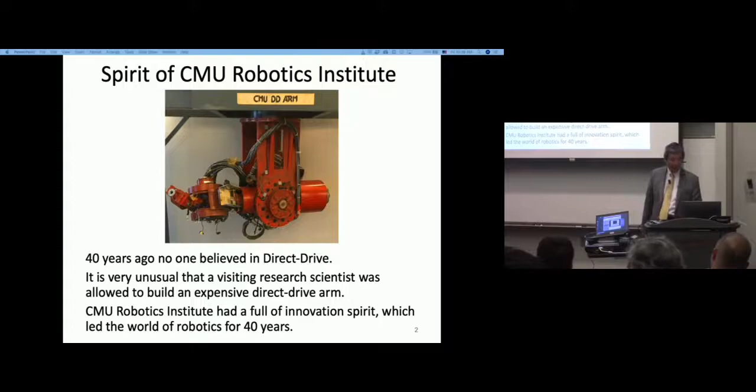The other part is power electronics. In the late 70s, the high power MOSFET just came out, and that was available to drive the big current. And these two technologies are the key things that made direct drive possible.

Well, after that, direct drive was actually commercialized by Adept Technology, and at one time Adept dominated the market, but it's a little expensive, so they were replaced by cheap SCARA robots.

This guy? Oh yeah, okay.

But one particular area, wafer handling and clean rooms, is exclusively served by direct drive robots like Brooks Automation, and here they can achieve less than 20 micron absolute position accuracy, and more importantly, no gearing, so no particles coming out. And it's easy to put suction inside the body, and that makes this one an almost perfectly clean robot.

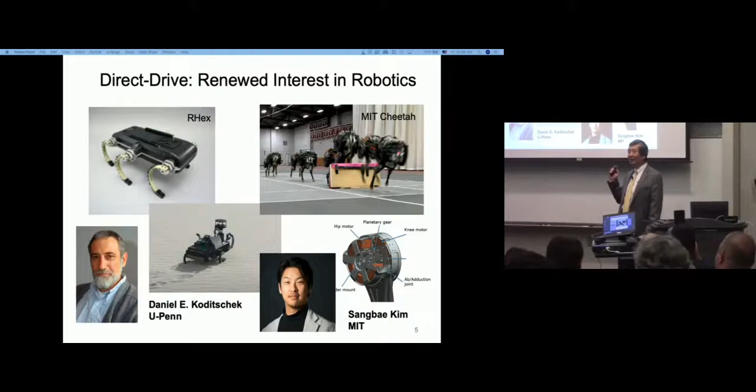Later, my younger colleague at MIT, Sangbae Kim, used near direct drive type motors to power these legs. In fact, almost 40 years ago, I attempted to convince Marc Raibert that direct drive is the way to go. But Marc is Marc, you know that, right? And he did a great job. But in fact, almost 30 years later, Sangbae Kim did it. And so that's the story.

Now, in this talk, I will not talk only about old stories, but taking the same spirit of innovation, I'd like to talk about the two major areas that I have been working on in the past less than 10 years. One is bionics, where we use living cells as a component for building robots. And the other is wearable robotics, specifically supernumerary robotic limbs.

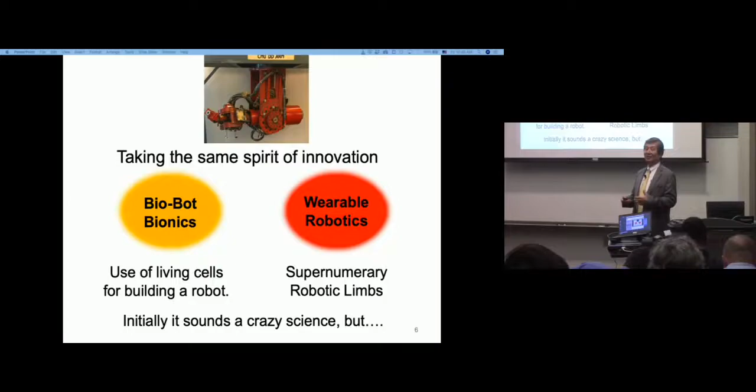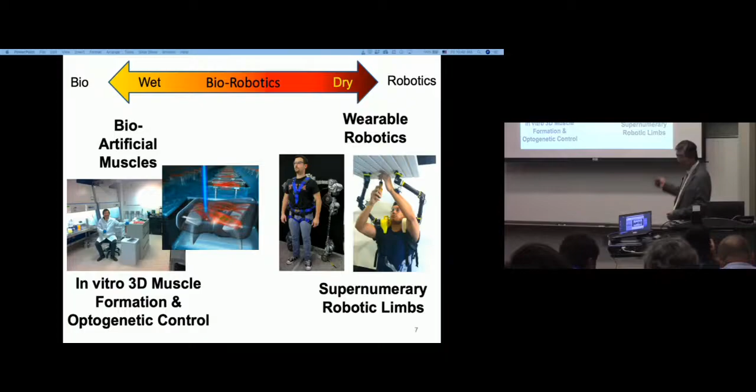When you hear biobots, bionics and the like, it sounds like crazy science. But someone told me, perhaps Takeo, that it sounds crazy now, but 10, 15, 20 years later, it becomes a standard. And so we hope that is to happen. My lab at MIT, one side is a cell culture room, bio-wet engineering. The other side is dry engineering, and we do robotics, wearable robotics in particular. Today, I focus mostly on this part. For this audience, these topics may be more appropriate.

So let me start with the supernumerary robotic limbs. You have a third arm and a fourth arm, or a third leg and a fourth leg, or you have 7 fingers on one hand. So these are additional limbs attached to your body.

When I came up with this idea, we tried to find a word which had never been used in the robotics literature. Supernumerary is sometimes used in the biomechanics literature, but never in robotics. Non-native speakers of English have to look at the dictionary, so that's the way I found this word. If you hear it once, you never forget. But it turns out supernumerary is hard to pronounce correctly 100 times every day for research and conversation. You get lost. So we just simplified it to SuperLimbs. So for today, we call it the SuperLimb.

SuperLimb is one unique type of wearable robot. Exoskeletons and prosthetics compensate for lost functionality, or empower the existing joints. On the other hand, SuperLimbs are extra limbs that don't follow the kinematic structure of the human, but come out, and we can use them freely. So it brings up many interesting things.

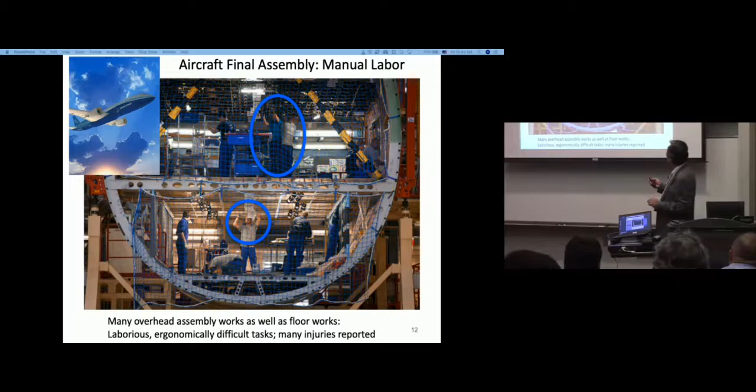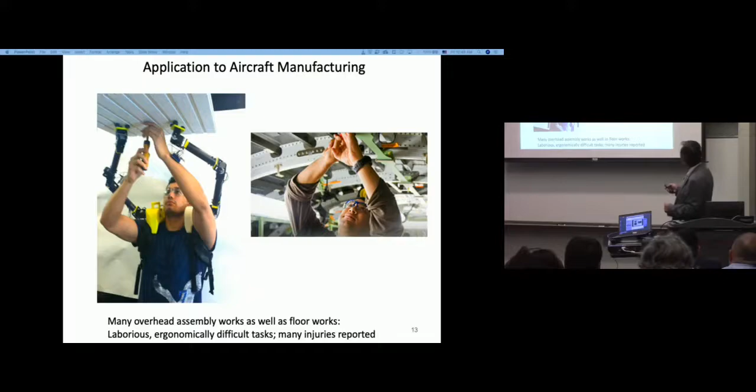The basic design concept came from real needs, and shown here is final assembly of aircraft. It's all based on manual labor. The people here work on the ceilings or floor the whole day long. They have a lot of trouble as they take these kinds of postures for many hours. Our solution is to put the robots on the shoulder, and that leads to this design.

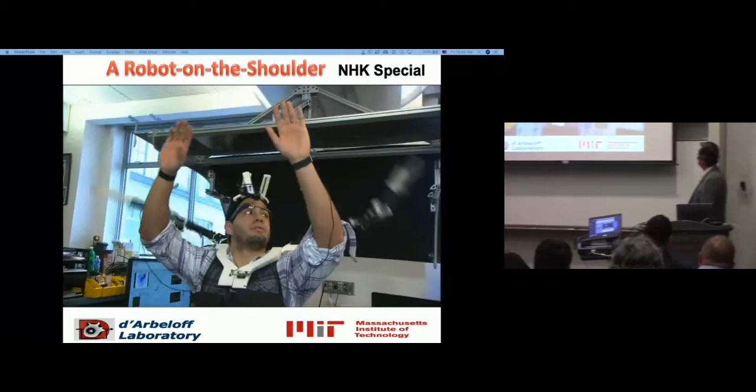At the Massachusetts Institute of Technology, robotics researchers are developing ways to add an extra pair of arms to your body. The robot will try to act according to what I'm doing. Robotic arms come to life thanks to artificial intelligence. The AI system monitors the wearer's arm movements, and eye trackers detect where the person is looking.

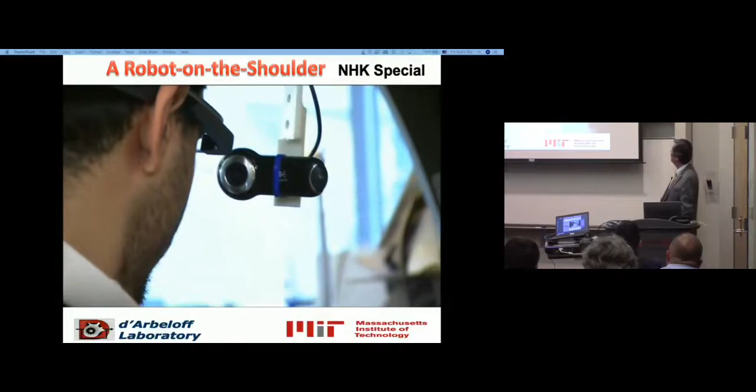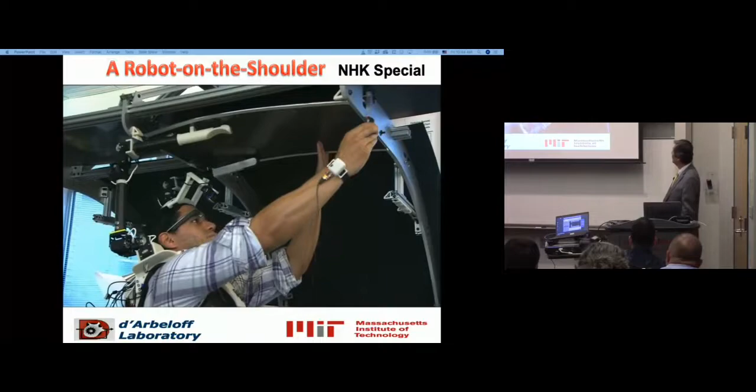From this data, it predicts the next movement of the wearer and automatically moves the robotic arms to a supporting position. No explicit human input is needed. The more you use the device, the more accurate the movements become as the AI system learns the way the wearer moves.

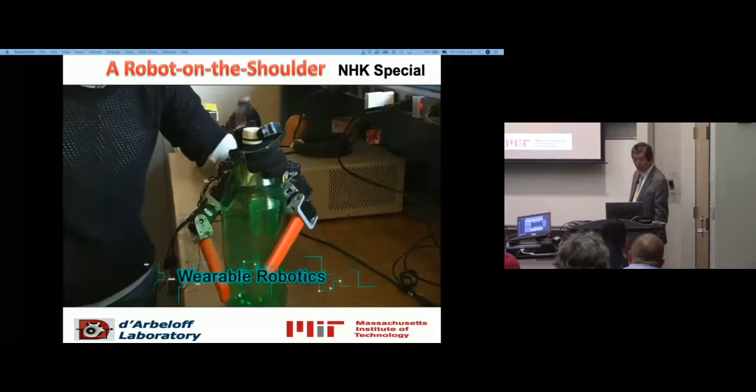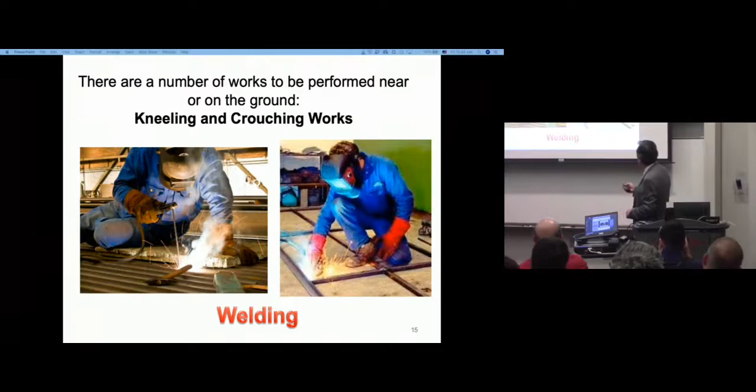You can see similar situations in construction or agriculture, gardening. You have to take that hard posture for a long time. If you continue that for a long time, you get troubles with the lower back and the shoulders and the neck and the knees. You have to extend your body to take the ergonomic posture, but you have to reach the ground. So you have to lean forward.

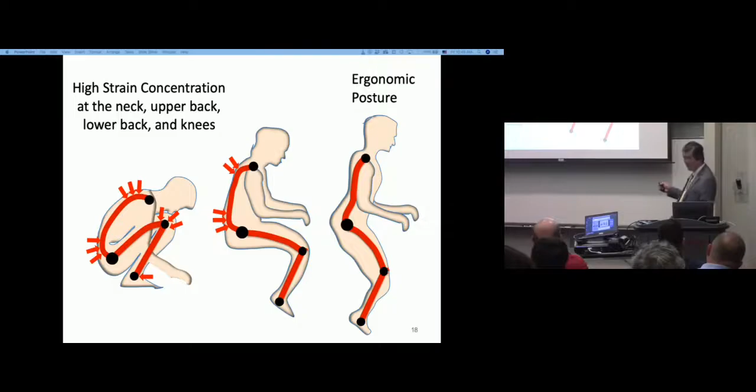Then you need the support that resulted in the concept of a MantisBot. The body is braced by extra limbs, and just like a praying mantis, freeing the two arms for eating something. So with this one, no harmful strain concentrations along the spine, and both hands are free for use, not used for just bracing its own body, free to use.

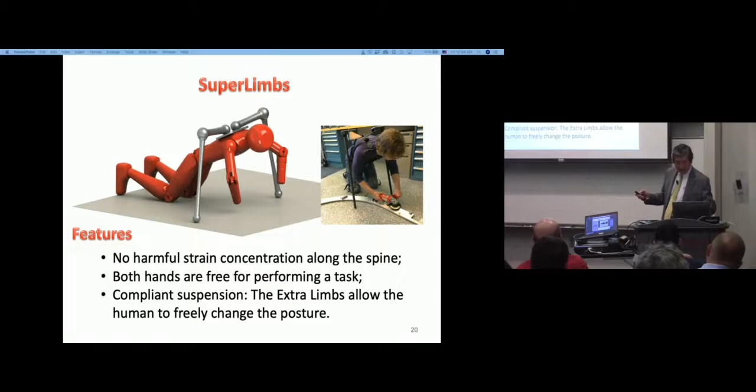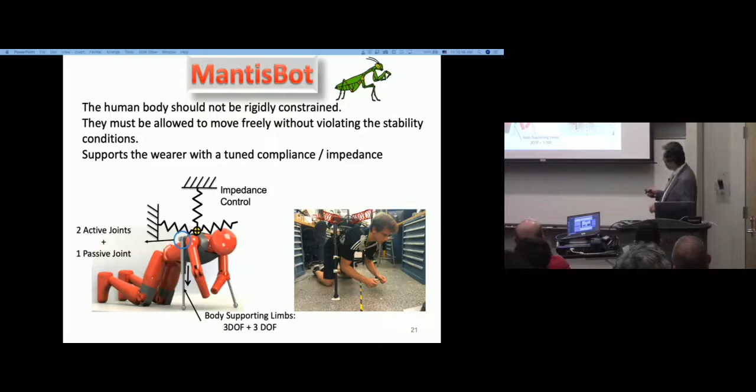And in addition to that, those are servoed joints, and we implemented impedance control. So the body is actually suspended with the desired tuned impedance and stiffness damping. So you are free to move. You can see the fundamental difference from exoskeletons. Well, an exoskeleton basically empowers, strengthens the joint strengths.

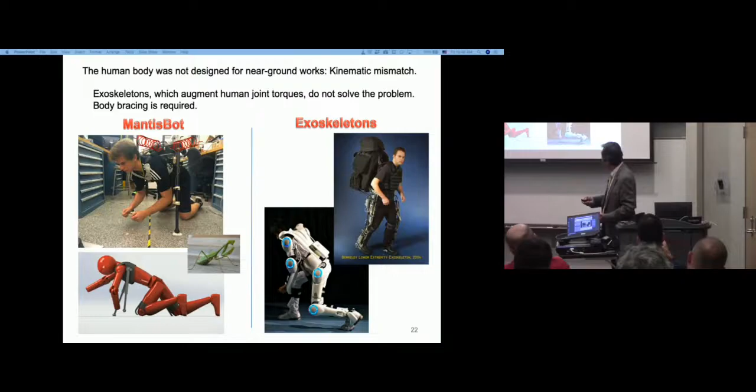But if you apply this one to this kind of work, working on the ground, you find that the human body is not designed for doing the floor job. This is a kinematically wrong configuration. So even though you strengthen the joint, it doesn't help very much. So you have to change the structure, and that goes to SuperLimb.

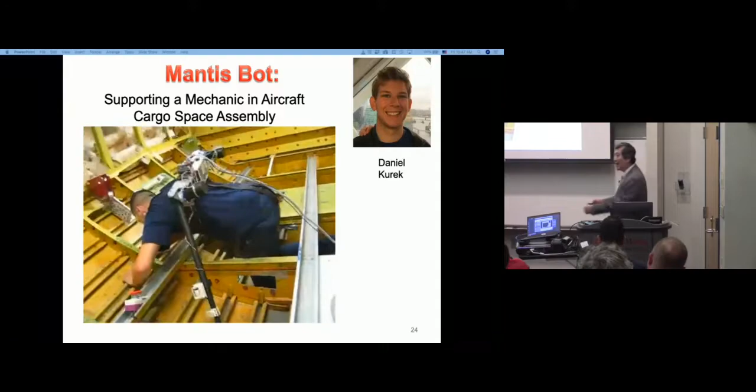So as you see in this case, floor work, they have to take this posture for a long time. So we tested this one. Simulated motions. So this is a Boeing 767 cargo space. You really have to reach in here and take this posture all day long. So there are interesting application areas.

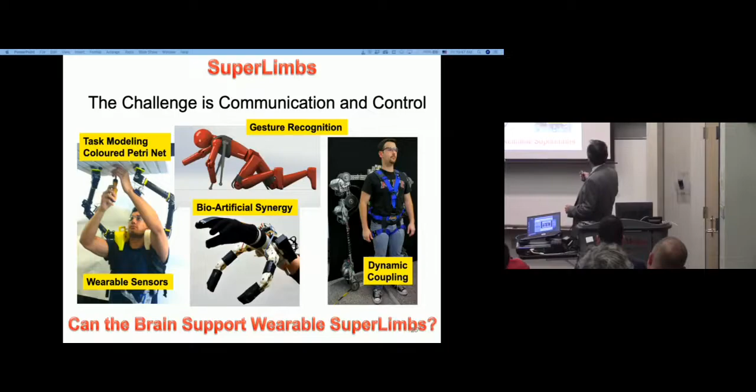We started with many different designs, but the challenge is communication and control. Unlike the exoskeletons, which just follow the natural legs and arms configuration and extend their strength, with SuperLimbs you can take any posture, so you have more opportunity, more freedom. However, you need more control and communication, and control is a major challenge. So we worked on this quite intensively.

One type of control is a spontaneous, independent control where you want to express your intention to the robot, putting some sensor here, right? The other side is actually reducing the workload for the humans, so maybe autonomous control. The robot has its own sensors and closed loop. However, don't forget that this robot is attached to the human body and has to work in concert with the humans. And if the robot does the job in its own way, it's out of control. It's not the kind of stuff that you want.

So somehow, how do you guarantee, assure the coordination with the humans? So one particular mode is the so-called leader-follower control. And then we extended it to bio-artificial synergies, and let me explain this. So simply, in the previous example, robots on the shoulder, we actually did some kind of teaching by demonstration method. This ceiling panel work has been done by 2 workers. Here's the leader and the follower.

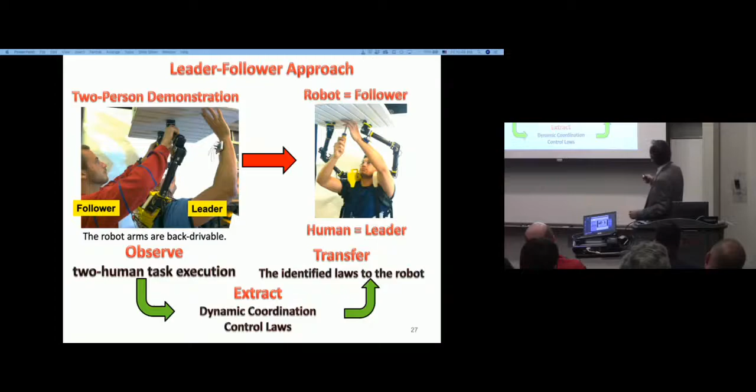At this time, the follower basically supports the leader, but at this time, holding this backdrivable robot, shows the kind of posture that this robot should take. And we take measurements of both the leader's arm motions and posture motions and the joint displacement of these. Then we get the data and extract the coordination predictor to predict from the human behavior to robot actions, and that is transferred to the robot.

So you take some time sequence data. Basically, we have many measurements, and set these time windows. So we get the 360 dimensional input space, taken from the human leader motions, mapped to predict the 8 DOF robot motions. So the measured output is the output data to predict, and we put it into a data matrix and do some partial least squares analysis.

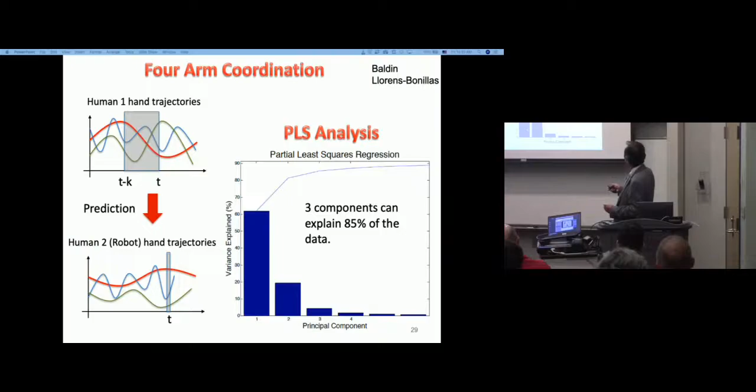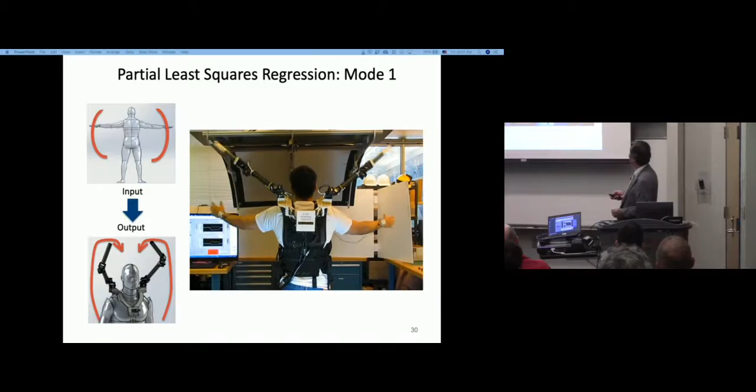Basically, we do singular value decomposition of the cross covariance matrix between input and output, and pick the first most critical component, the second one, the third one, just like principal components. And the first few components explain almost 90% of the data. So this is the first mode. As you move this, the robot reacted to this. This is what you did in teaching by demonstration. And this is interesting. Mode 3 is kind of an unexpected mode: you move this, and the robot reacted to that one.

So we basically simplified the high dimensional stuff. And at the end of the day, we need to measure only 3 components. And then each of them goes to 3 modes. And these modes are called the synergies in the biomechanics and motor control literature. The brain does not control the individual muscles, but instead the brain controls groups of muscles, as shown by the eigenvectors. So just the 3 components allow you to do that.

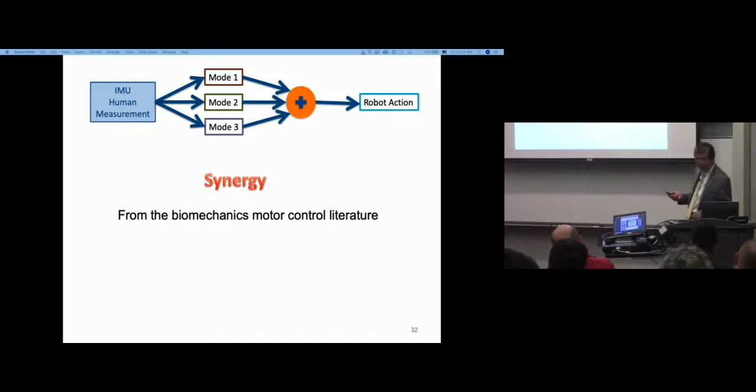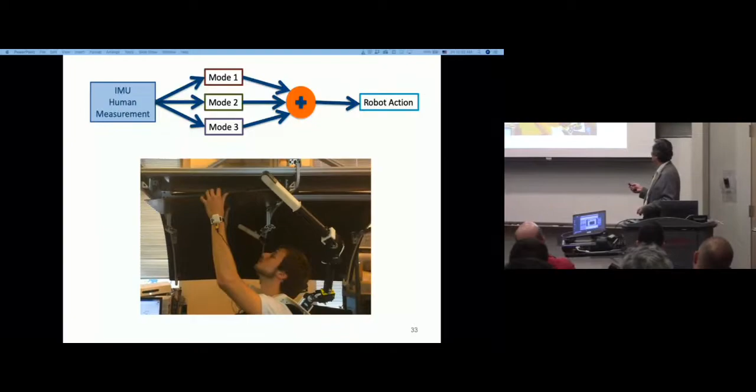So as he moves up, this robot reacts to it, and as he moves, taking that measurement, the robot recalls what was done before, and moves to the next section.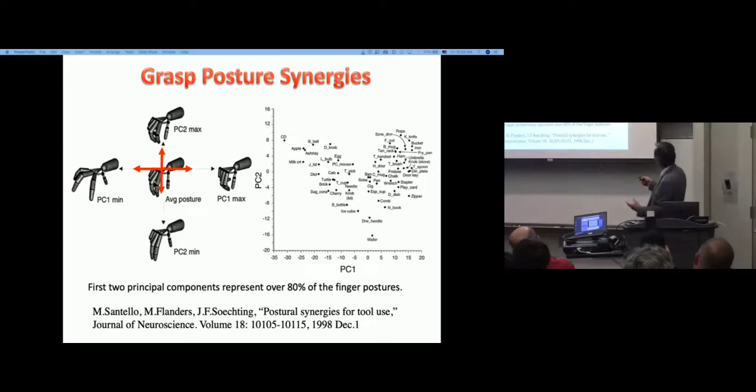Well, the same thing we applied to grasp postures, and it is known that the 5 fingers are not moving independently. According to Santello's experiment, he took the finger joint angles, 19 joints, when human subjects tried to pick up eggs, a toothbrush, and so forth. They got some data and did principal component analysis. The first 2 components: one is open and close, in phase. The other is kind of twisting. These 2 modes explain more than 80% of the data.

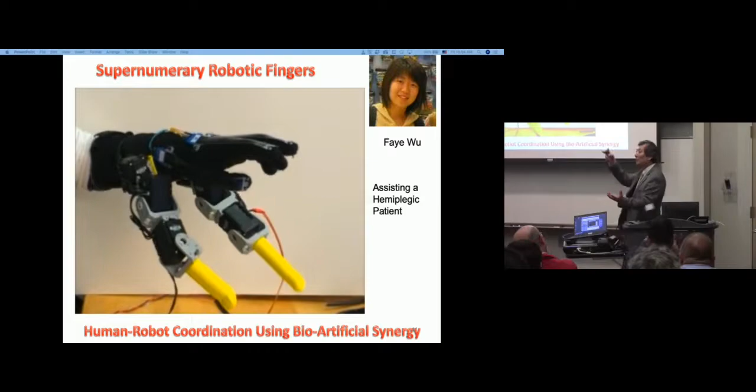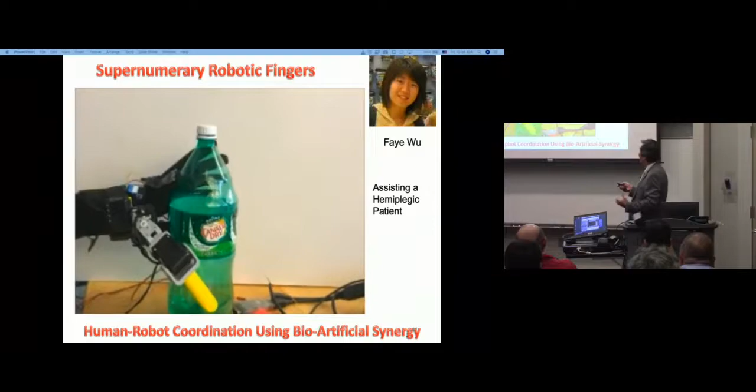So again, we have many degrees of freedom, but the central nervous system does not control individual muscles, but groups them together, right? So as if the nervous system extends to these fingers, if that is the case, what is the behavior you would see? Although we don't have the nervous system here, it looks like it's actually extended to this.

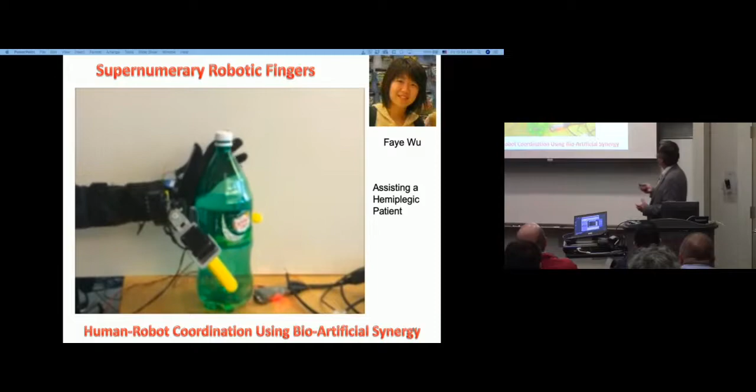Now, this work is primarily for assisting hemiplegic patients. So one side of the arm is not usable. So they appreciate it if the one hand can hold and manipulate some tools like this. So that is a leader-follower type of control, and we call this method bio-artificial synergies.

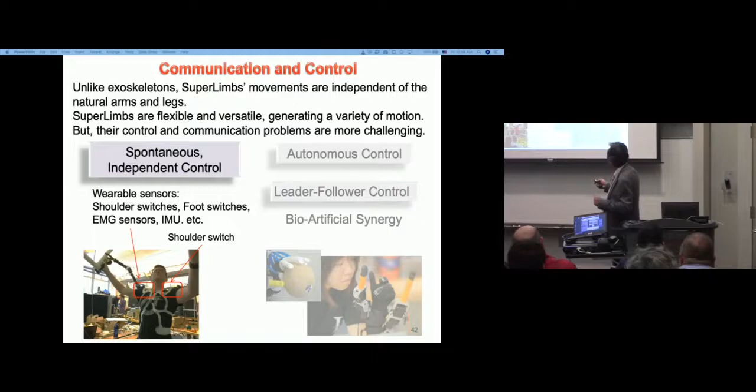Now, the other side is spontaneous independent control, and people try to put many wearable sensors at many parts of the body, including foot switches and shoulder switches, so that it does not interfere with the main task, but can also control the extra limbs. Now, an interesting point is that looking at the whole body, hands are the most dexterous part. So if these hands are available, you would use joysticks or switches to control it. But those most dexterous hands are usually busy performing the main task, right?

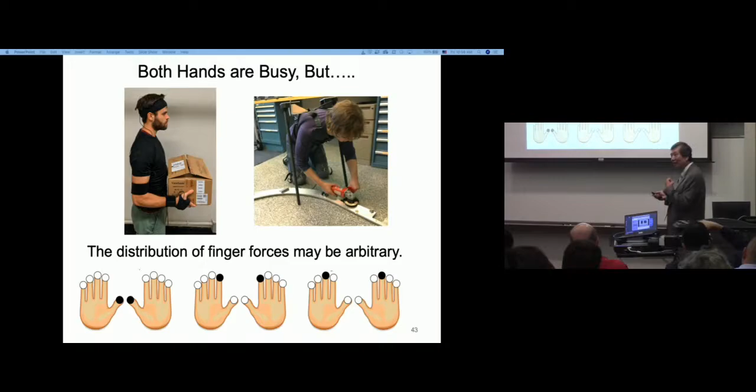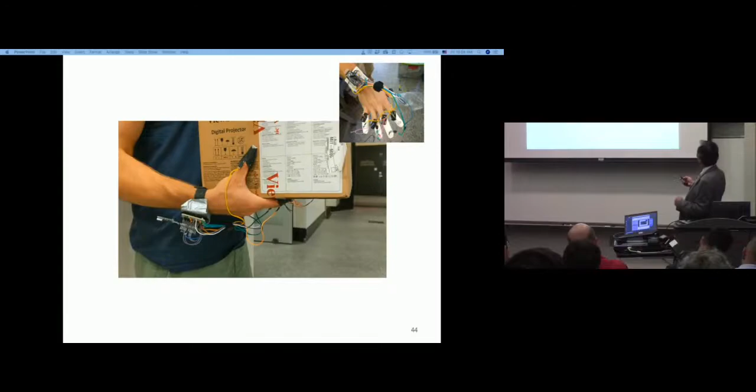However, if you think a bit more carefully, holding this grinding tool, of course, the total forces created by 10 fingers must satisfy a certain value, but although the sum is fixed, the distribution of finger forces may be arbitrary, so that gives you the chance to create some code to send to the robot. So here's the fingertip sensor implemented. You don't have to detach from it, but just by changing pressure, you can send some commands.

What we do is first ask the human subject to show many finger holding operations, and it turns out that the first few components again represent most of the data, leaving the 10 dimensional space beyond this point unused for performing the primary task, that is, holding some tools. So you can use this space for sending coded signals to the robot. That's what we call null-space communications. So pushing this one, SuperLimb up, this one SuperLimb down, so that kind of code can be created.

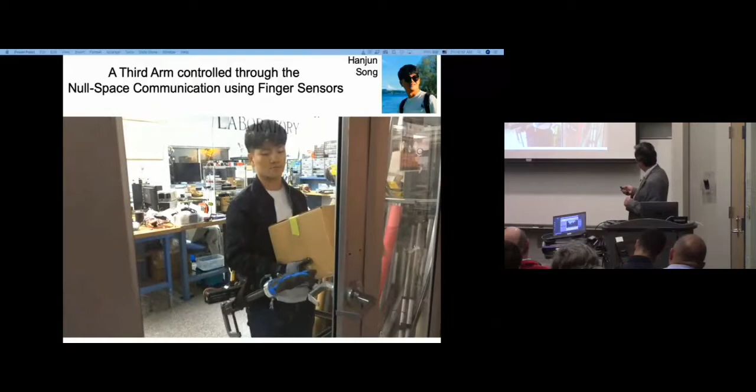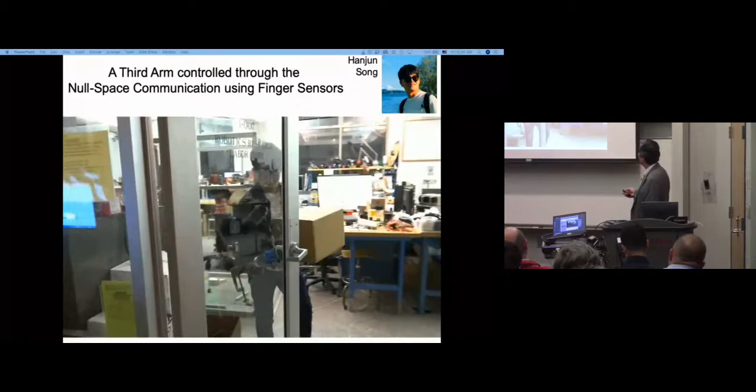So Hanjun is wearing the simple robot, and he's also wearing the glove there, so he can control this robot with this, although both of his hands are busy holding this box. But he can control this, right? So it can go, and he's going to the elevator hall. Oops, elevator's coming. I do not recommend this, but you can do that.

Yeah. Hey, Hanjun! It's been so long, man. So that party.

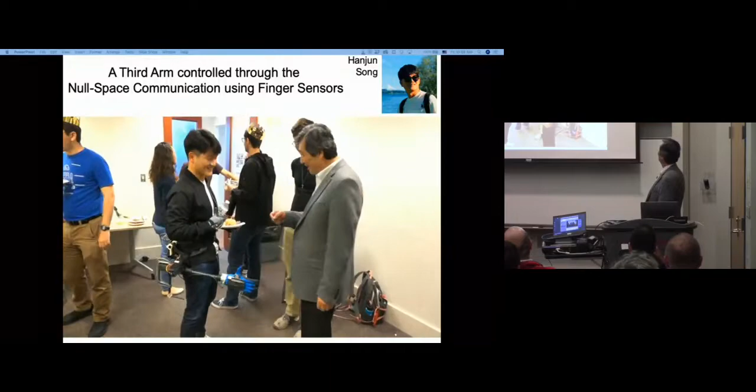You are? I suggest that this may be a good costume for Halloween, and if you wear that and move around and move stuff, but don't do it for your kids.

Now, on the more serious side, control of SuperLimbs is not just a sensor design in that kind of a program. We face much more profound scientific issues. To a large extent, SuperLimbs are to perform multiple tasks, right? So maybe two of them are SuperLimbs, bringing a foreign object attached to the human body. Can the brain support the SuperLimbs? Can a human control the natural arms and SuperLimbs simultaneously? Would there be some kind of cognitive limit to it?

And if you look at the brain, all the places are kind of busy; the body image occupies the whole part of the cortex. Is there any room for the SuperLimbs to create their own brain image over here? However, if we do the right things, and the SuperLimbs are nicely mapped out in here, would it be possible that the wearer gets to perceive the SuperLimb as a part of his or her body, an extension of the body? How can we make that happen?

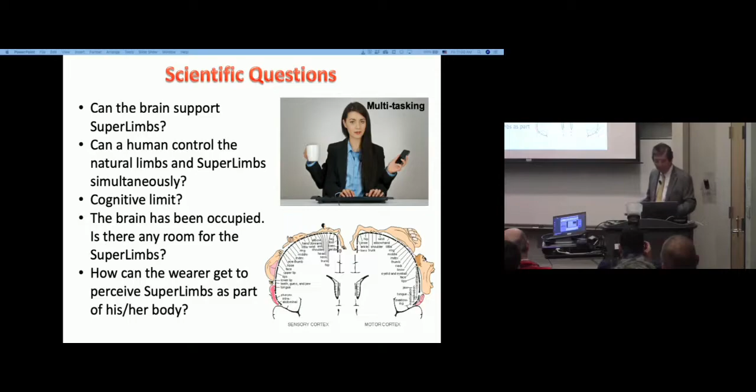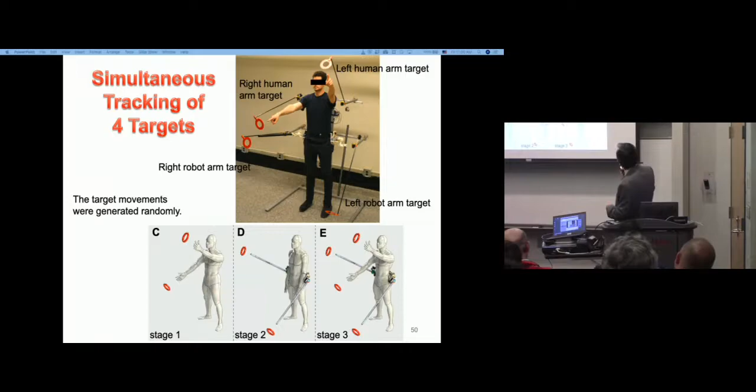So, Federico Parietti did the first human subject test. What he did was he built two simple 1DOF SuperLimbs, here and here. And his arms also have to follow these targets simultaneously. So in this experiment, the human subject is pointing their arms along this marker direction, to this one and this. And these are the SuperLimbs, pointing at this marker. This one is a little hard to see, but the black ones are pointing at this one.

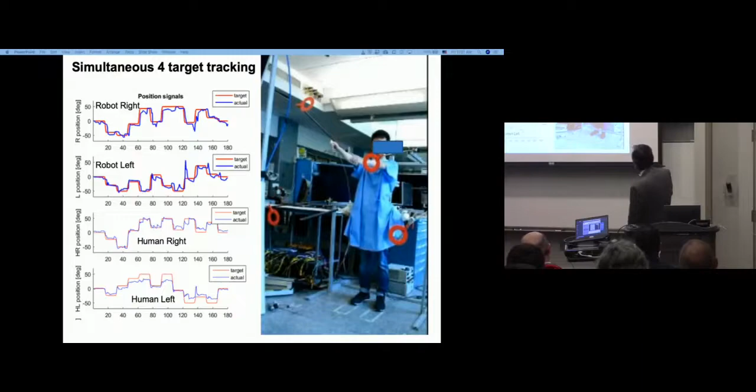And they change the locations simultaneously. And you have to make sure this one is pointing in certain directions. If you see this, the robot right arm, the robot left arm, the human right and left arms are approximately tracking this reasonably. He used EMG, in particular measuring the muscle activities at the abdominal part, which is not used for the arm motion, so we can do it independently.

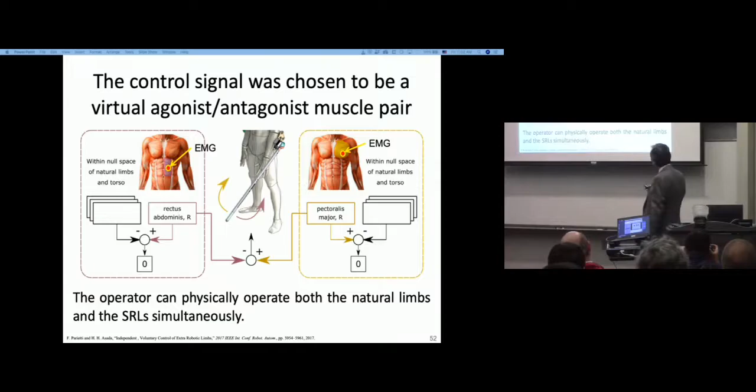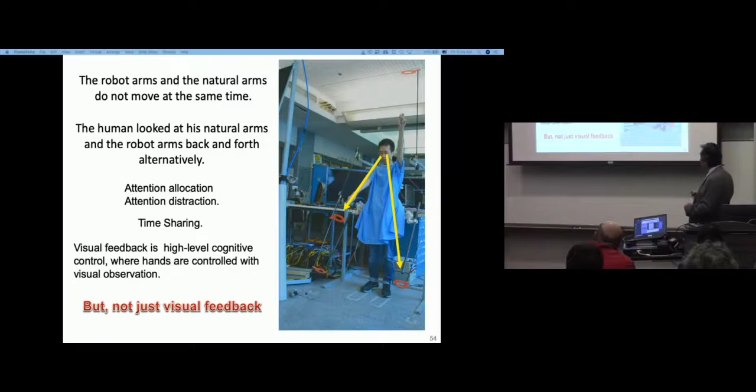Now, visual feedback, the high-level cognitive control, dominated this experiment, and hands are controlled with visual observation, but not just visual feedback. We have some haptic feedback. This is the interesting part. This is the robot on the shoulder. The robot is holding this part while he works on fixing it. The force borne by the SuperLimbs is transmitted to the wearer's shoulder over here. So the wearer recognizes and confirms that the robot is really bearing the load. The robot is not sitting on the floor but attached to the body. So we have inherent haptic feedback acting on the body.

So in some way, this direct haptic feedback may reduce the visual cognitive load of the human, and the SuperLimb has this unique feature, feedback that can be exploited. So Jacob Guggenheim looked into visual and haptic feedback in depth and how they work together.

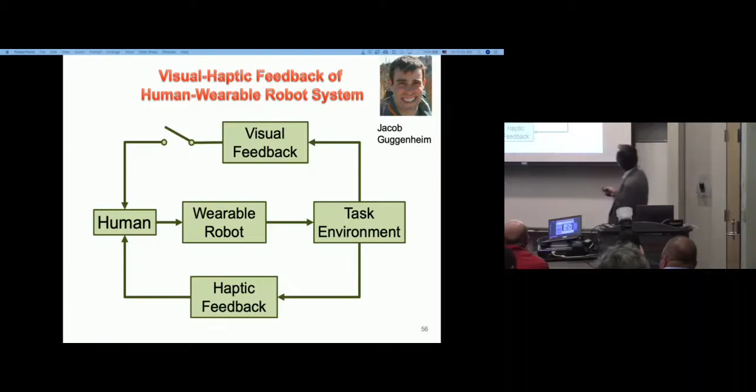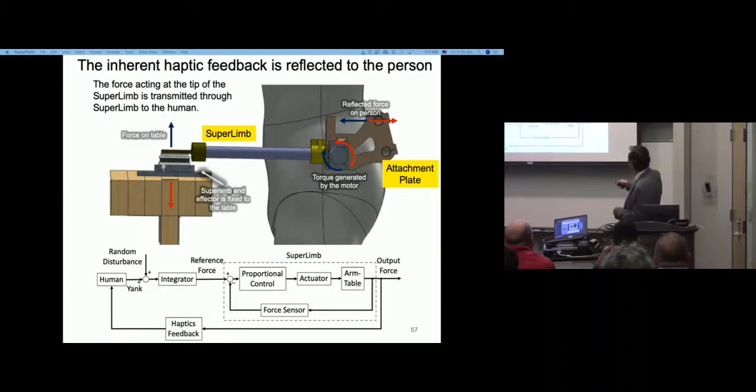In his experiment, first he developed a simple SuperLimb over here, which is contacting the table and applying some force. Thereby, it receives the reaction force, and that's transmitted to here. And he designed a simple attachment plate. Through that, the human senses the force and torque being generated here. Well, the back is the most insensitive part, but he found that the robot and the human can control this force feedback loop through this haptic feedback.

And there's no statistically significant difference between these two cases, even though you impose an additional visual task. Most of the human subjects did equally good work as with the haptic-alone task. The visual task degrades a little bit as you add the haptic task, but the difference is not statistically significant.

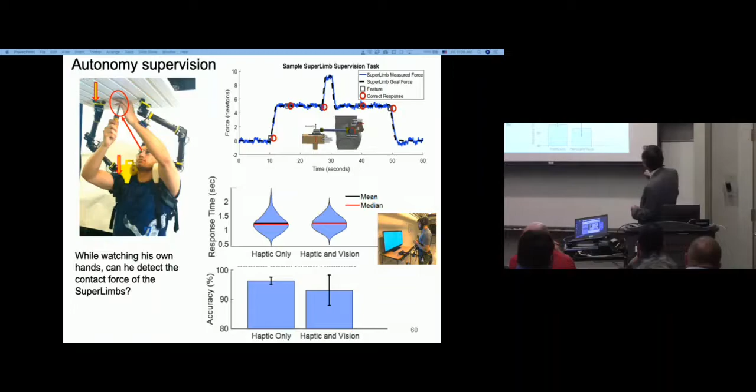It turns out that again, with both the haptic and the visual distraction task performed at the same time versus haptic alone, there's no significant difference between the two. This one's also not so significant. So we can conclude that there's no statistically meaningful difference in performance between simultaneous haptic plus visual task versus haptic task alone. So this is good news for us, because visual and haptic feedback can coexist and function simultaneously.

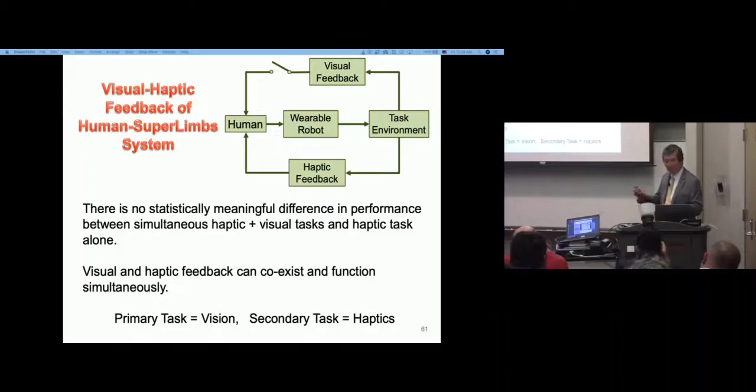So when you're multitasking, mostly the primary task will be done by the natural arms and monitored by vision. And the SuperLimb is mostly supportive work, the secondary task. Visual attention is not going there, but the haptics is always acting to see whether something is going wrong.

Let me talk about one more interesting thing. This one is the DOE project. This is radioactive waste management systems, and the workers there have to wear very heavy personal protection gear. It includes the oxygen tanks and the air conditioners. If you put everything together, it's more than 30 kilograms, so 60 pounds. It's a very heavy load, working there for a long time.

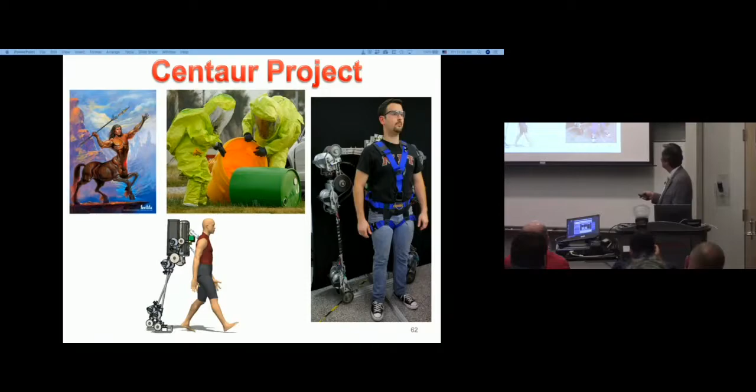So we built a robot to reduce the load, and all life-saving equipment is carried here, working together with the human. So it turns out the two human legs and the two robot legs have to work together when walking. And this turns out to be an interesting problem, because with two pairs of legs in animals, the central nervous system creates beautiful coordination between rear legs and front legs. Likewise, BigDog has a nice computer to coordinate this, but we're dealing with half human, half robot systems.

We first tried to combine this rigidly, just like the exoskeleton people do. It turns out that's not a good idea.

And in fact, if you connect these with some compliance and a dashpot, we created a very interesting behavior. If you look at the animals' walk, the front legs are number 1, 2, the rear legs are 3, 4, and it goes 1, 4, 2, 3, 1, 4, 2, 3. That's actually the gait, right? When you're walking, because that maximizes the static stability.

Now, interestingly, as you model this as two independent biped systems and connect them through a dashpot and springs, initially it's an arbitrary phase, but after some time the front legs and rear legs are 90 degrees out of phase, which is exactly what animals do. So these two are not connected through active control, but just by passively connecting them, we can actually do interesting jobs.

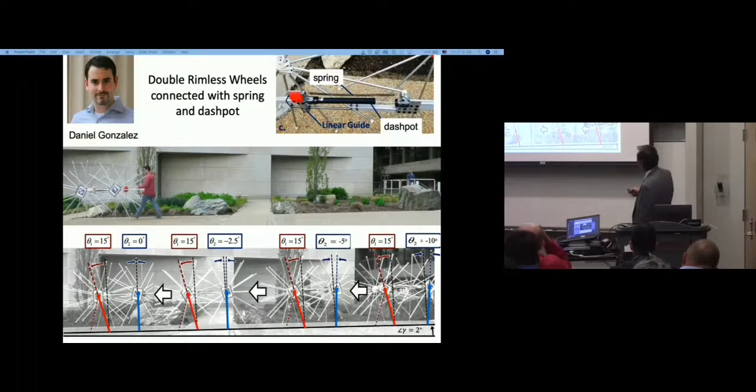And so now Dan Gonzalez did a very interesting experiment. This is actually two sets of rimless wheels. Both are connected through just passive springs and a dashpot. He started with some arbitrary initial conditions and let it go. Interestingly, at the end, these two are exactly 90 degrees out of phase, or 25% of the cycle. So initially, then he measured this, it's going there.

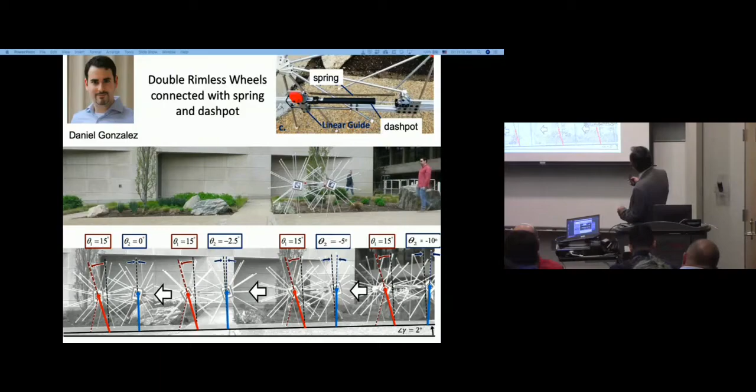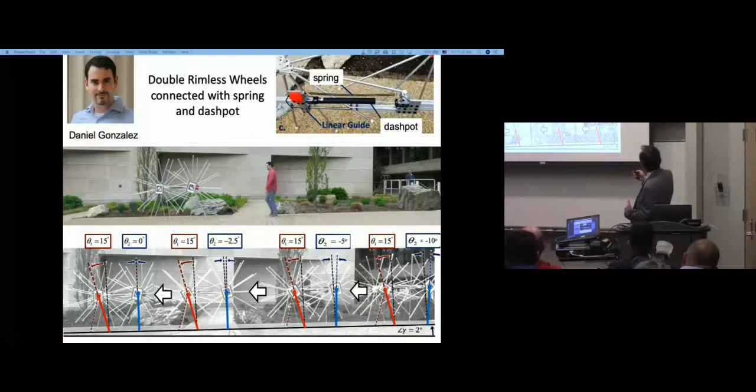There's no active control or communication between this part and this part, but dynamically interacting through the springs and dashpot, it arrives at the right phase, which is wonderful, and that leads to very stable locomotion.

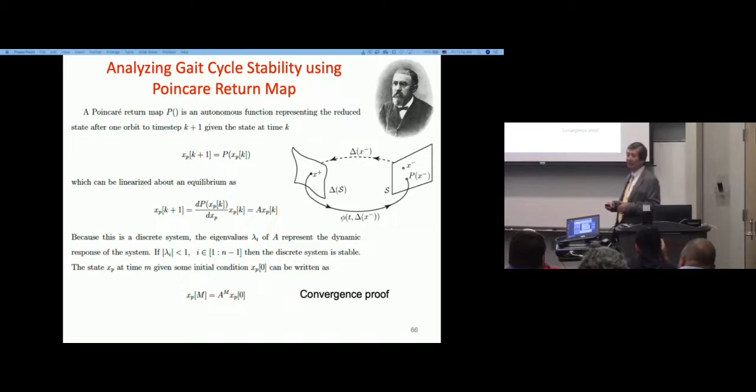Of course, we did some analysis, and this is the Poincaré return map. That's kind of a standard technique in the legged locomotion community, and we checked whether or not these two rimless wheels converge to a certain desired phase lag, and we accomplished that for certain combinations of damper and spring constant. Yes, the systems converge to that one firmly.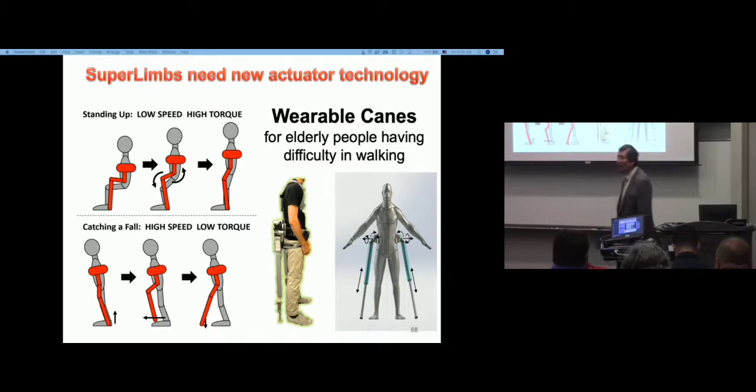So it turns out that if you plot it on the speed-torque characteristic curve, you use these motors in two extreme conditions. One is that you have to generate a high torque at a very low speed, or you have to move it quickly through space where only a small torque is needed. So how can you meet this?

If you just pick one motor to cover these two extreme cases, you have to pick a gigantic motor, whose output power is maximum in the mid range. This is the least used region. So the actual power coming out of this is just this much or this much. Very bad usage. So we recently solved this problem by combining two tiny motors.

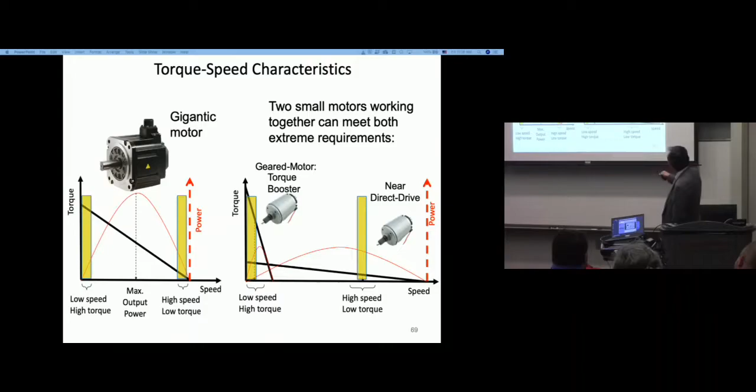It's called the dual motor design. One motor is near direct drive, in the high speed range, and the other motor is a geared motor with high gear reduction. It's called the torque booster. So by combining these, we get much more efficient operation. There are two ways of doing this dual motor, dual speed actuator. One is adding two speeds. The other is adding two torques.

Adding two speeds, typically we use differential gears. So the high gear, high torque motor comes in this way, and here's the direct drive, going to this. For high speed motions, this one takes most of the velocity. But in the high torque case, this one plays the major role, but this has to bear the same torque. And this one cannot actually bear the torque, so we have to use a brake or non-backdrivable gears such as the worm gear, which is very bad in efficiency.

So this is one design, and the other design is to add the two torques together. This is actually interesting too. Let me start with adding the two.

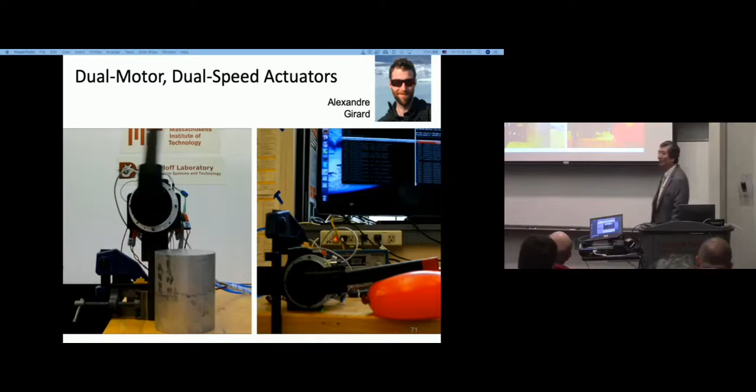So it moves very quickly, and then pushes the very heavy stuff. And as soon as it hits, the brake is on and it changes the mode, and it becomes 20 times bigger torque being generated. This one too, once it hits, it switches back, and large torque comes out.

The other way is to use a different architecture, torque superposition. In this case, the previous one is good, but it still needs to use the brake, and that's not good, and it's a little bit bulkier. So we try to minimize the mechanisms, and our solution was just putting them together. So this is direct drive, and this guy is just attached, connected to this. We don't want to use any mechanical switches or on and off brakes.

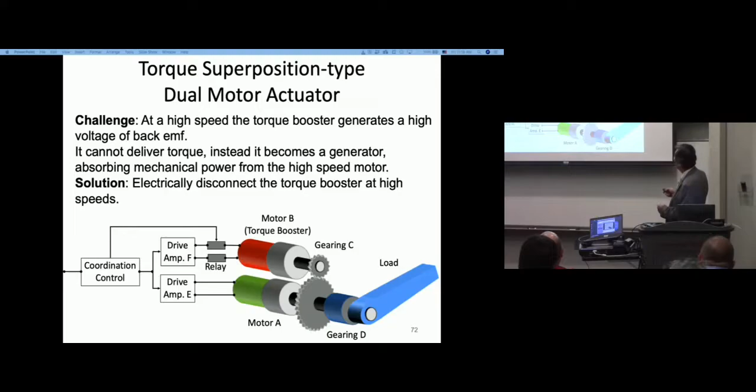So the problem is that in high speed mode, this is spinning at high speed, and this one cannot catch up with it because it's high gear reduction, and if you rotate it, it creates a large back EMF voltage. So in a sense, this works as a kind of generator, eating up the power from this, which you don't want to have. So the idea is that we make not mechanical switches, but electronic switches. We basically disconnect these motors from the drive system. So let it go. That is a simple idea.

And this is the recent result. So this lamp is on when the torque boosters are engaged. When accelerating, large torque is needed, velocity is still low, and the torque booster is working. But after moving here, the torque booster is electronically disconnected. John Bell developed the time optimal controls in doing this. So here, just a single motor goes up and around. It takes a long time.

But on a dual motor, with this switch off mechanism going up beyond this limit, if the travel distance is further, it goes higher, and comes back, right? And coming back is along this trajectory, which is very quick deceleration because the torque booster is engaged again. That quickly stops it, so we can shorten the time. If we do not switch, it takes more time. And the top speed doesn't go up beyond this limit.

What time is it? Okay. Just 2 more minutes, okay?

You're very interested. Okay. I had to show this at the end, but this is really, how to say, the crazy science. But we've been working on it. Use of live cells as components of a robot. In particular, we are interested in cardiac muscles or skeletal muscles, and using them as actuators.

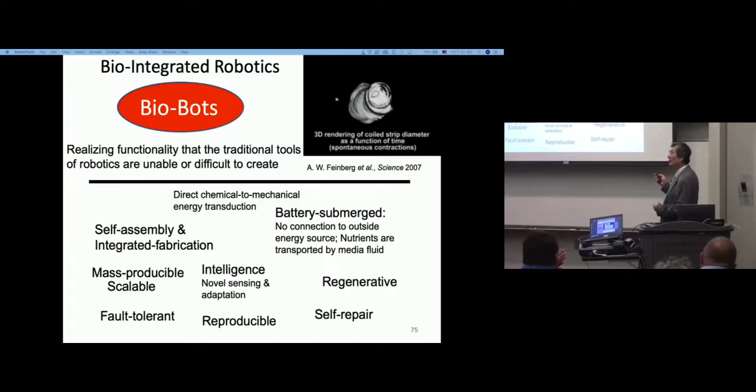If you try to build a small robot, the difficult point is always how you power it and how you run the cables from the battery to there. But these animals, I would say the robots, is it robots or animals? The robots. They're basically submerged in the media, so nutrients and oxygen are transported through that. Of course, you have to use some vascular network.

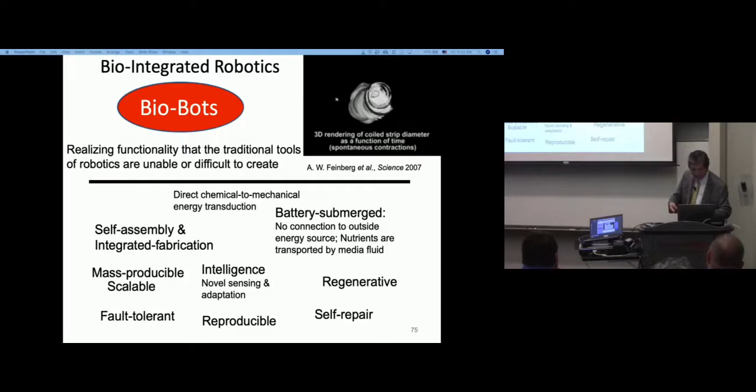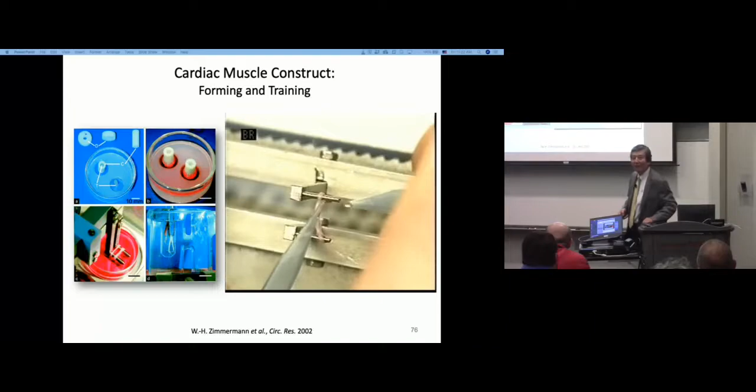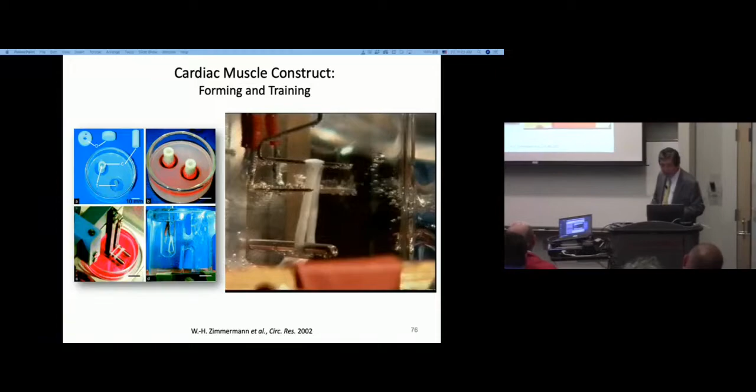Well, you think that live cells are a totally different kind of species, hard to handle in traditional engineering, but in fact, it's not. We use a lot of mechanical engineering type techniques, including fine molding techniques. We mold them, and these are cardiac muscles, so they are spontaneously contracting. It's not a rubber band, it's actually muscle, so it moves in this way. So that is something already existing.

However, how do we really control and coordinate that? That's very important. The traditional method is to use electric stimuli, putting in some electrodes and then stimulating. One problem is that in a wet environment, the current flows unexpectedly, so you can't pinpoint which particular muscle to activate, right? And also, it has relatively slow kinetics and poor reversibility, and most importantly, it's very invasive.

On the other hand, we successfully accomplished optogenetic control. Instead of electric stimuli, we shine light on the muscles, which are changed to have a different behavior, so that they respond to light.

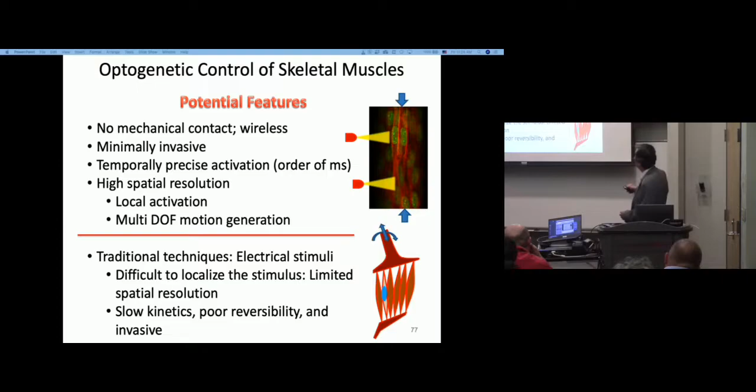So no mechanical contacts and wireless communication, minimally invasive, and actually temporally very precise. And also important is that spatial resolution is extremely high, and a multi-DOF motion can be generated. My postdoc, Selman Sakar, did it first back in 2012 for skeletal muscle. You know that the cardiac muscle contracts spontaneously, but for the skeletal muscles you have to provide the stimuli from outside, right? So he used optogenetics, and say in this case, 3 muscle strips sitting here.

If you expose all 3 of them to light, all 3 shrink. If you just shine the light only over this part, only this strip contracts. So in this case, first with this blue light all 3 muscle strips contracted, and putting this, only this guy contracts, and on the other side just this guy contracts. So the spatial resolution is wonderful. We can actually contract each specific muscle strip individually.

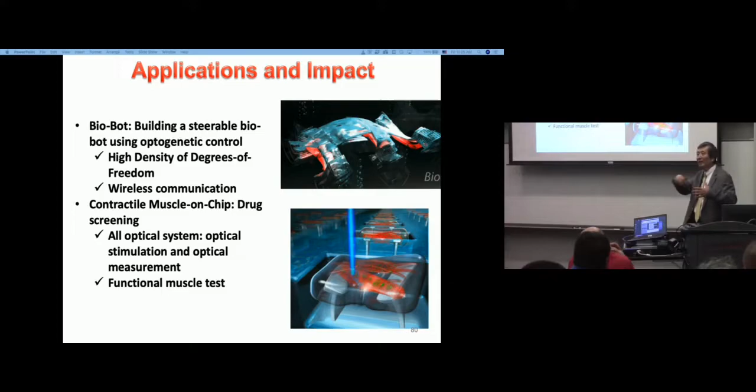So extending this, what I'm dreaming about is that if you want to make small robots, you need to put say 10 degrees of freedom in an area less than just a millimeter. There's no engineered actuator that can do that, but muscle actuators, yes. There's a potential you can do that. And also, if you make this out of iPS, take the cells from you and put them into that, putting it in your body and then fixing something, and after that it's biodegradable and nothing harmful. So that is something interesting in the future view.

So to summarize, we talked about human SuperLimbs. Humans can possess the 5th and 6th limbs, and SuperLimbs are practically useful, I would say. And we showed the robot on the shoulder and the mantis bot and the wearable fingers. And control is actually more challenging. We looked at the use of the null space communications.

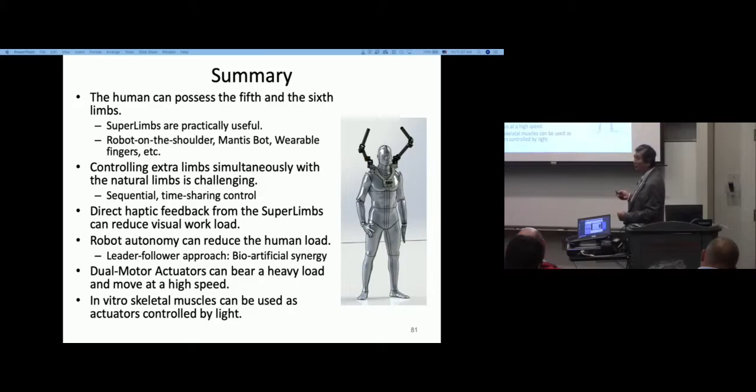Vision should not be overloaded, but these robots are attached to the human body, so we can actually exploit the inherent haptic feedback. And that inherent haptic feedback and vision systems go very well side by side. So the main natural arms are supervised by vision, but SuperLimbs can be observed and monitored by the haptic sense. Dual motors are very promising. That's today's technologies. But if you extend your scope to the future, biomaterials can be used as components of robots.